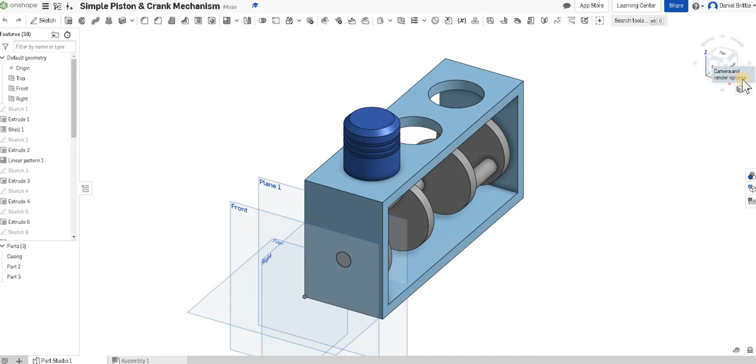We're now going to create the connection between the piston head and the crank. What we're going to do to start with is change our view on this right hand side, and we want it with hidden edges visible.

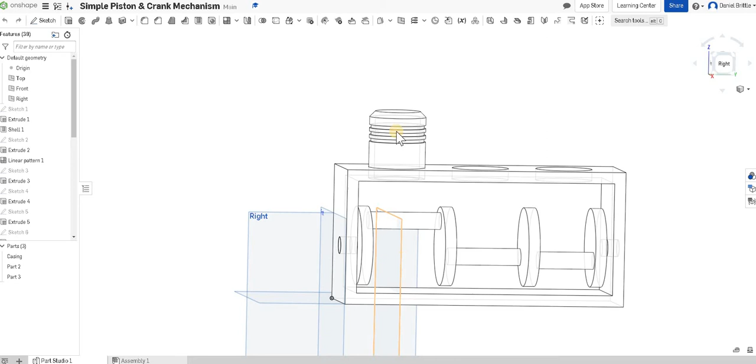There are lots of ways to do this. We're taking the shading off completely because it's hopefully going to make our drawing easier to do. We're going to draw it on a new work plane, the one we created earlier, Plane 1, and that is in the center here. So when we extrude, we bear in mind it's in the center.

So let's draw on that work plane and create a sketch, and we'll look at it from the front so it's a little bit easier to do. We want the connection to come over this bar here, and over this one here as well. So let's start by drawing a rectangle just over the two, making sure we don't get any orange locks on there because they'll make it more difficult to dimension.

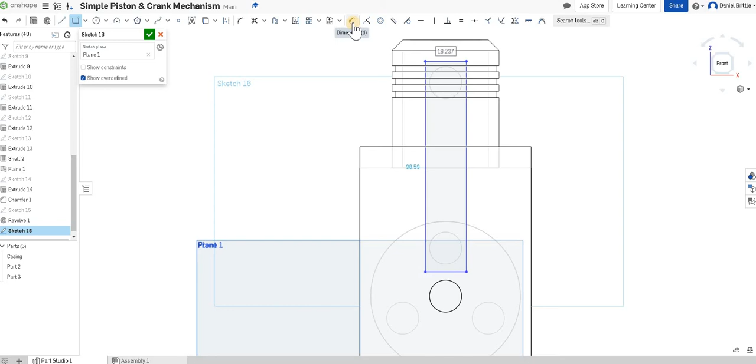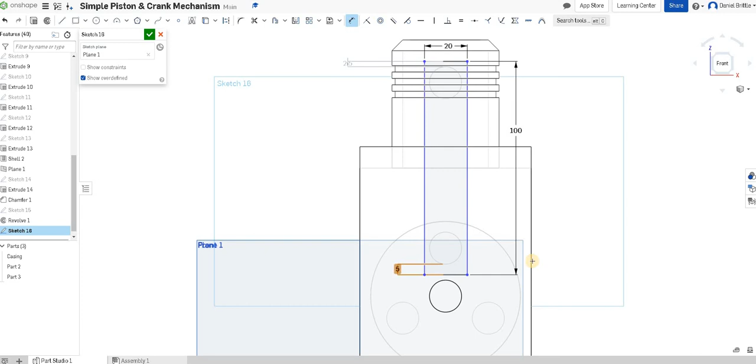We're just going to do the same, measuring from the edge to the side here as well, and that's going to be 2.5 to make it even, because the circle is 15 and the width is 20, so 15 off 20 gives us 5, half of that either side leaves us with a 2.5 there. So with that done, that's good so far.

We're also going to use a sketch fillet tool at the top to add our rounds in, so we click on the two that we want to put the round between. A round of 5 looks a bit small for this, so I'm going to up that to 10, so it's going all the way around and creates a half circle at the top. We're going to do the same at the bottom. I didn't put that last one down, did I? My mistake. And that's it.

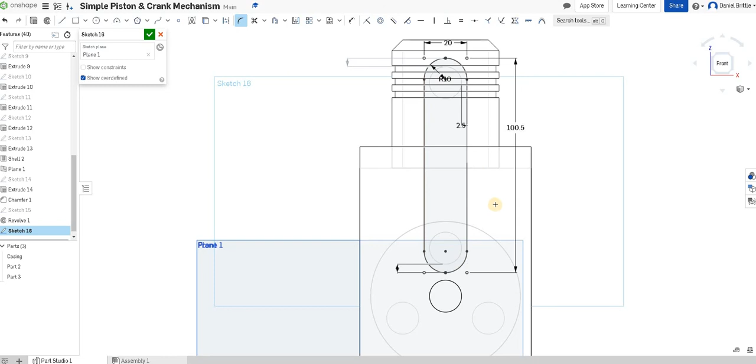Okay, so we've got that arm, the connecting arm, now created. We'll finish that sketch and we're going to extrude now.

There is a chunk of this that I know when I come to assemble won't work, but what I want to do is carry on and show you why it's not going to work, and how you then use that information to develop your design ideas in a project kind of style.

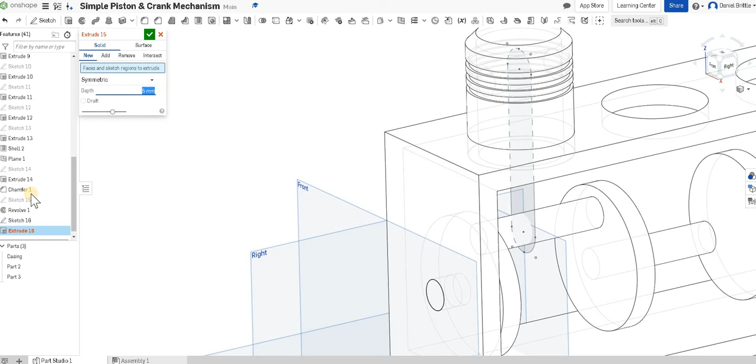So we're going to make sure that that's symmetric, and we're just going to make that 5mm thick. We don't want it too thick because it will get in the way of everything else. So we've got it symmetric, 5mm, and then it's that sketch 16 that we want to extrude.

What you'll see by selecting it on the features list, it's going over the whole thing, it hasn't created the hole. So I'm actually going to cross that sketch 16 off, and I'm going to select it from this drawing here. That's still doing it solid, so I do need to go back into the sketch and add the circles in as well.

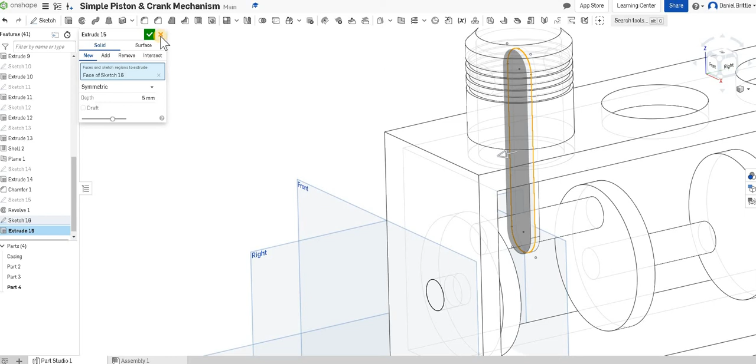So we're going to just cancel that extrude now, go back into sketch 16, edit, look at it from the front, and we're going to have to draw these circles in ourselves. So if we draw that in, we'll then have to dimension it in a second, and we'll draw the same one in. Don't get locked onto anything because that's going to make it more difficult for doing your dimensions.

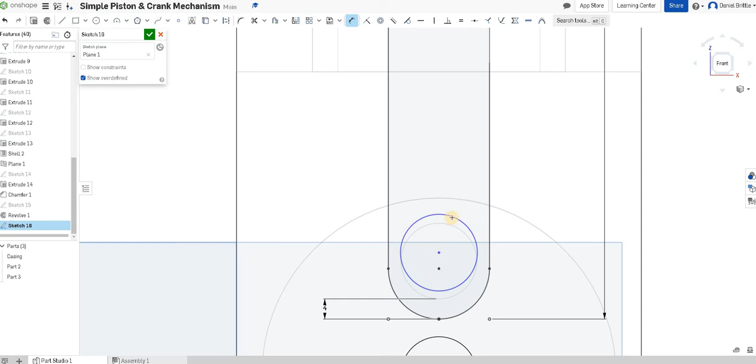Here we're going to set the size of the circle as 15, and the distance between the center of this and the side is going to be 10, which is already done, which is nice, so we can actually just delete that out. And the distance from there to the bottom, take your time to get it to measure to the right point, it'll make all the difference.

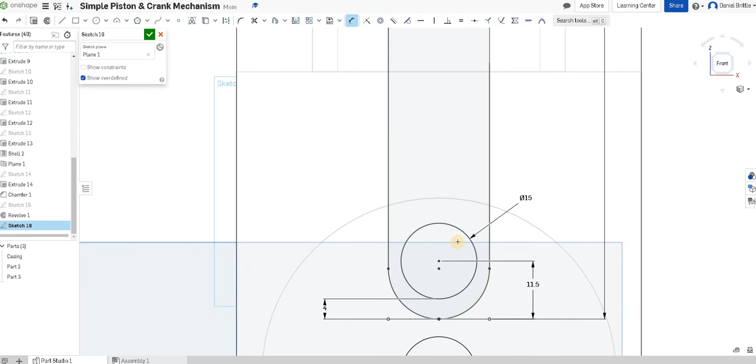Should be, oh, 10's not quite right, so that might be 12. Play with it until it's perfect. 11.5 maybe? That's a very strange number for it to be. Okay, 11.5 works, so you can see it marries up perfectly, and then we're going to do the same on the top. Let's add our dimensions in.

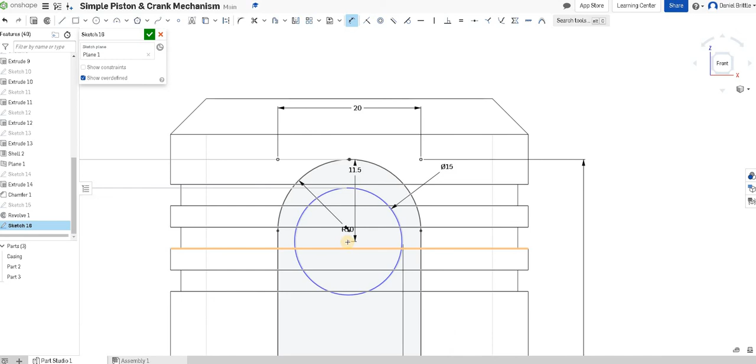So 15 diameter, distance from the center to this edge, make sure it's the dot that goes orange, not the lines. There we go. And that, if it matches the bottom, was 11.5. Nice round numbers we're working with. And then we're going to make that 10 from the side as well.

Okay, so they're drawn in. We can finish that sketch. Now our extrude will work. So let's rotate that round so we can just pick that on its own. You can see now that we're extruding and it's not taking those circles there.

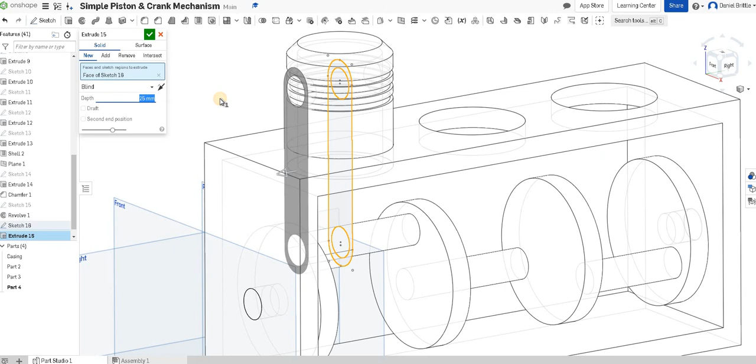So we want it to be 5mm, and if you remember we changed it to symmetric so it went either side and stayed in the centre of the piston, and we can finish that. So we've got that bar connecting the two together, and we only need to create the one, because we're just going to use the same bar, the same piston head, on the next two holes in our assembly as well.

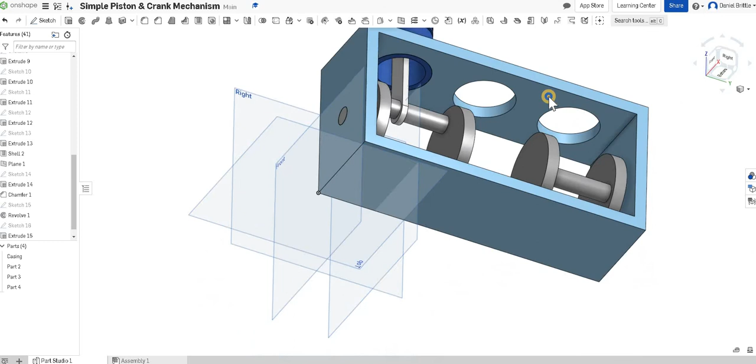So let's turn shaded back on and see how it's looking. We've got our bar connecting, so hopefully when this rotates round now, it's going to pull the piston head down and push it back up again as we're animating that. So the only thing we need to create, the last thing, is the handle, and we'll do that in the next tutorial. Good luck.